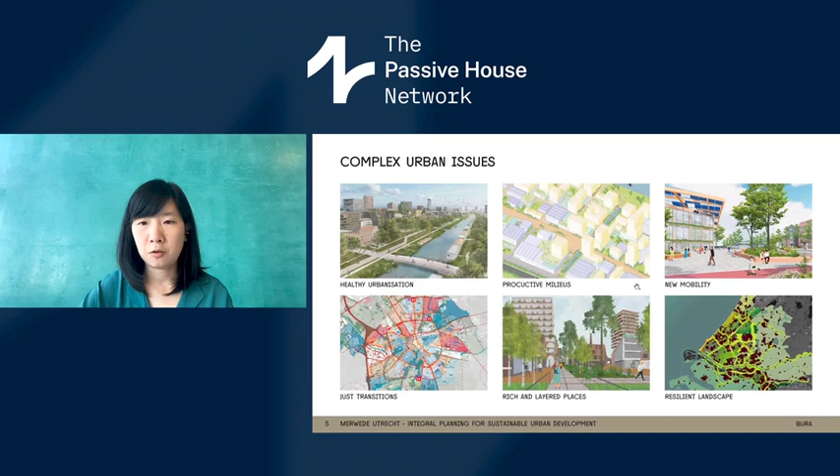We seek balance between ambitions and feasible design solutions, and we also build on existing city inhabitants and qualities. We have experience in complex urban assignments and also expertise in multiple themes, such as healthy urbanization, productive milieus, new mobility, just transitions, rich and layered places, and resilient landscape.

Merwede is one of the representative projects of BURA, which employs integral planning and research by design in its process. Merwede is a project in Utrecht, and Utrecht is a city in the Netherlands. It is known for the historical city center, the characteristic canals, and also the historical monuments and university.

One of them is the compact city approach, which means to guide a balanced mix between different districts and to limit car use and accommodate urban densification in a healthy way within the urbanized boundary.

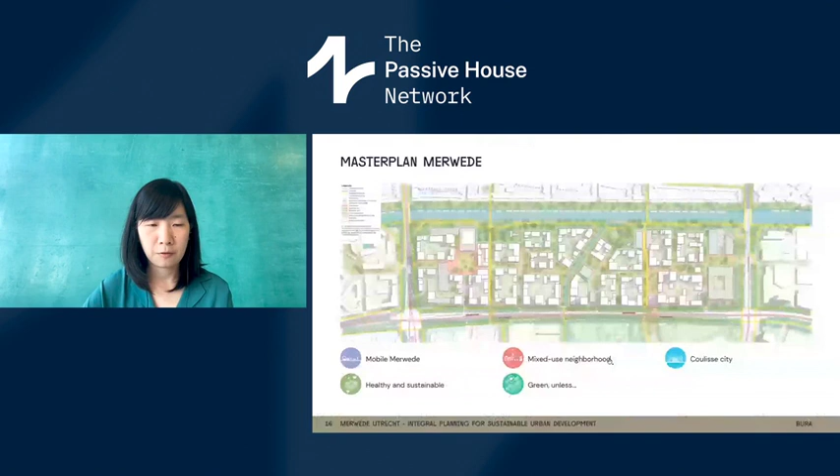This is also the master plan we proposed for the area, with example designs of the buildings presented in the project. In Merwede, we have 5 ambitions: mobile Merwede, healthy and sustainable, mixed-use neighborhood, green, and the Coulisse city.

Coulisse city is one of the main features of the urban quality. That means a layered building volume and morphology with emphasis on human scale and the city on the eye level. It also focuses on the quality of light and air and the porosity of the blocks. We organize those principles into an urban rule map, which provides a guideline for the architects who will design the different blocks and buildings.

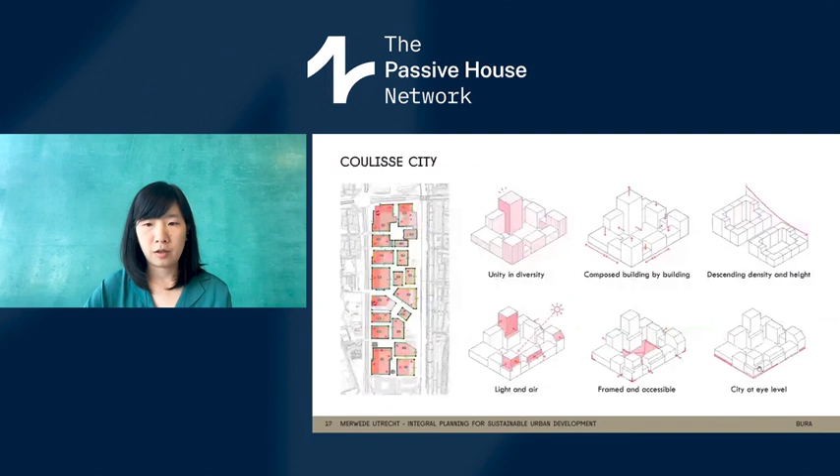Here you can see an example of the design by the architects, showing the principles of human scale, setbacks, green, and so on. An interesting aspect is that we designed the urban plan with exact rules but also flexible guidelines, so that together with the diversity of the context, the urban framework, and the programs, this can lead to innovative and diverse solutions from the architect's side.

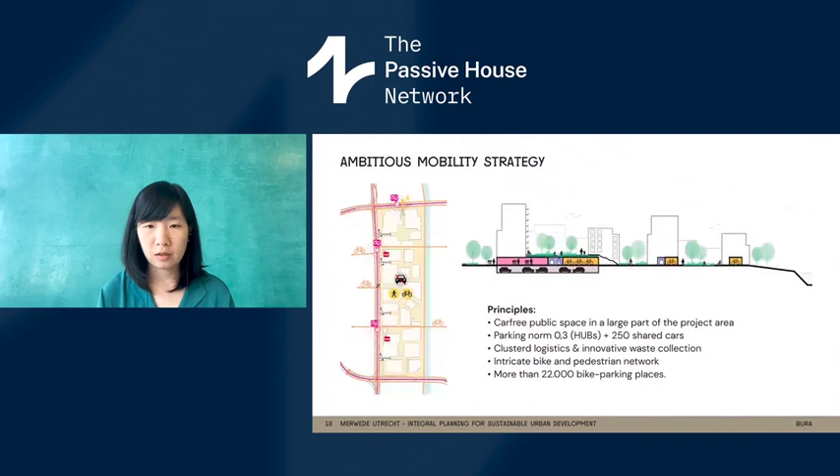In terms of mobility, we have a very ambitious goal. We make the area mostly car-free and invest in a good bike, pedestrian, and public transport system. Next to that, we organize parking with around 1 parking space for every 3 households, so it's a very low parking norm, plus around 250 shared cars. We also have more than 22,000 bike parking places that will be added in the area.

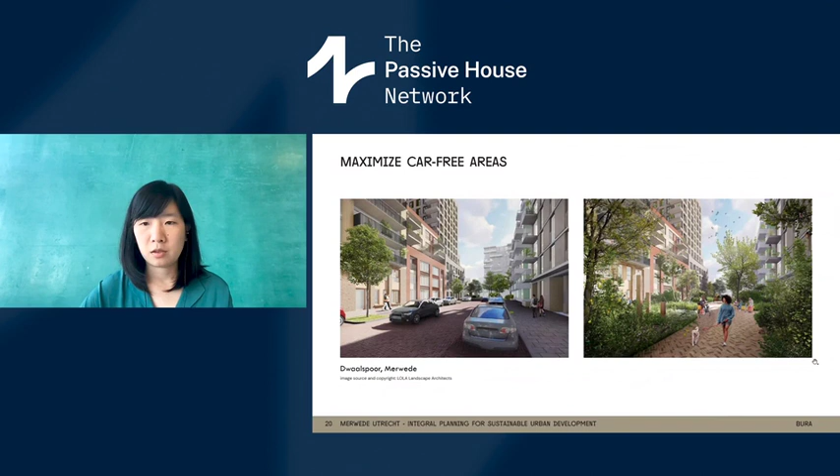The car-free principle provides us the opportunity to design the public spaces differently. From these renders, you can see that the same streetscape can look completely different, with much better green and public space quality, when the paved areas are reduced to the minimum, only for necessary routes like emergency routes for vehicles.

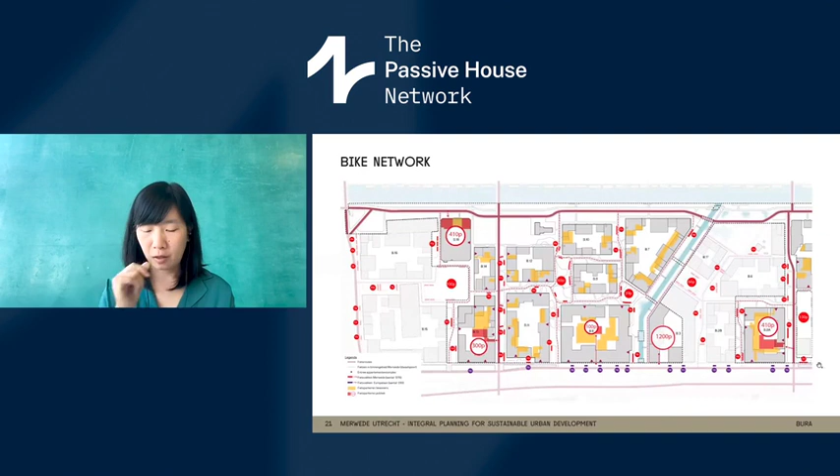Together with the landscape architects, we carefully designed the bike network with different hierarchies for the bike routes, and we also carefully distribute the bike parking for the residents and visitors of the district. Here shows one of the east-west cycle routes through the project area, which will connect Merwede to the surrounding neighborhoods and the city. The pavement materials are also carefully thought through so that there is a different hierarchy indicated, and there's a balance between accessibility and ecological quality.

The car-free ambition also means that we need to organize the logistics differently. In the area, we allow logistics with limitations in terms of time and routing. We also introduce innovative solutions such as light electric vehicles, logistic hubs, and mobility hubs.

In terms of program, Merwede will not be a monofunctional residential area, but a mixed urban environment where basic facilities are available in the vicinity. This can stimulate a healthy lifestyle with less car dependency. Roughly 15% of the total program is dedicated to commercial, social, and business programs.

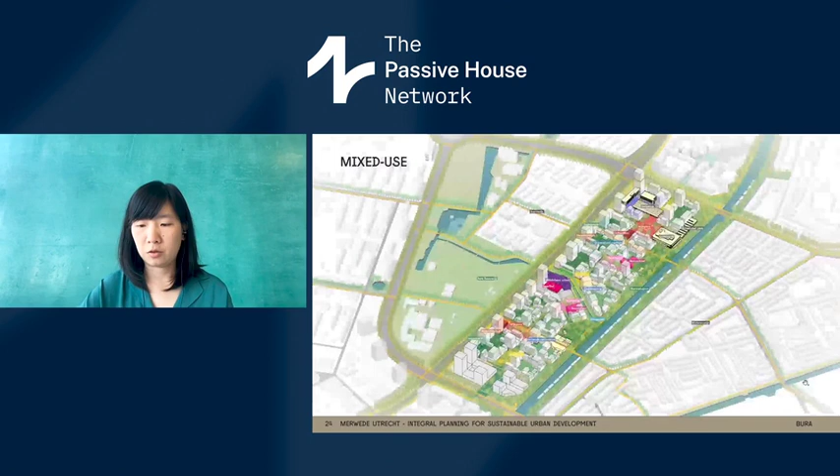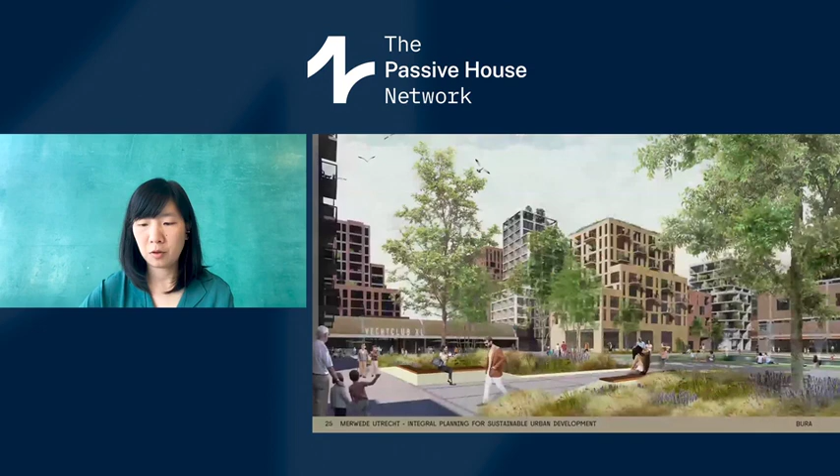We also have different types of spaces. As you can see, the two main neighborhood squares are situated around more lively programs, but there are also more intimate and green spaces for people in the area to enjoy calmness in their everyday life. This is an example of one of the main neighborhood squares, where you can see the dynamic plinth and programs, and also some of the existing buildings that we keep and transform into new use.

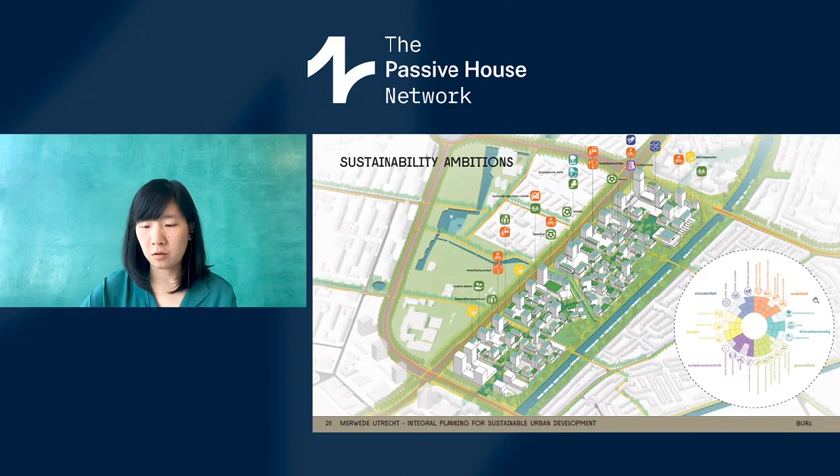Merwede aims for high sustainability ambitions. We have one of the largest heat cold networks in Europe. For all the roofs, we make use of them for either solar systems, green, or collective spaces, so there's no roof left unused. Overall, it is also a search for balance between the different aspects of sustainability, optimizing them with a good spatial distribution.

The sustainability goal in Merwede also has a social aspect and plays a very active role. We have proposed a Merwede City Lab that will connect residents with experts and the latest technologies and innovations for sustainability solutions. So it's not just about achieving technical and scientific goals, but it also plays an important role in social interaction and an inclusive process.

In terms of green, Merwede provides a high-density urban environment, but also at the same time green and relaxing. The principle is that green, unless necessary, is leading in Merwede.

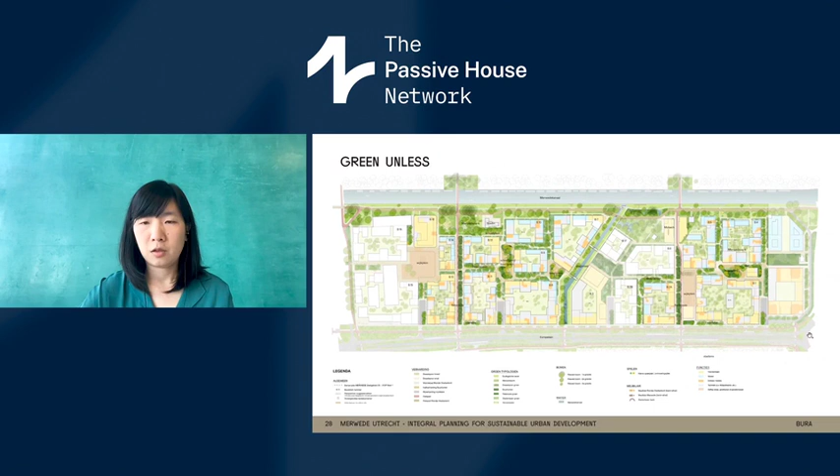This means the starting point is green, and paving in public space will only be done when necessary—for example, for some bike routes or paths for limited vehicles, or parts of squares beside busy facilities.

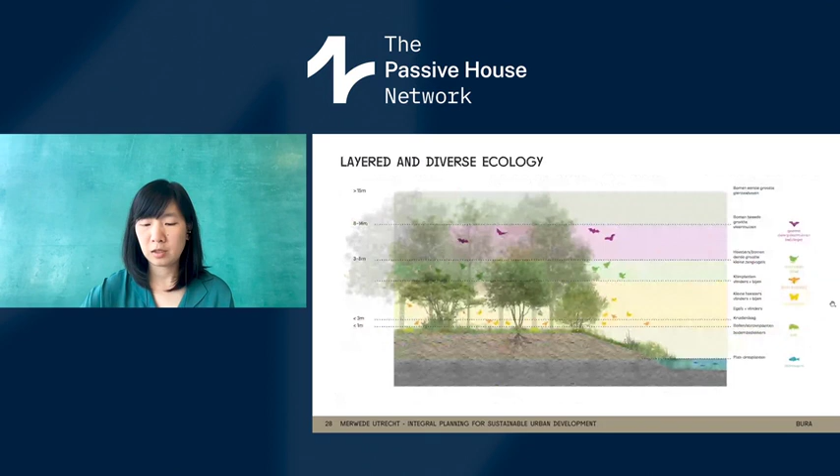The green in Merwede is also diverse and layered. It is not just short grass with clean-cut trees, but also different herbs, bushes, and a wide variety of trees.

In this way, the green structure is robust and can provide a good environment for biodiversity. The building blocks also have their green tasks, including inner courtyards and green roofs, to provide habitats for target species like animals and insects.

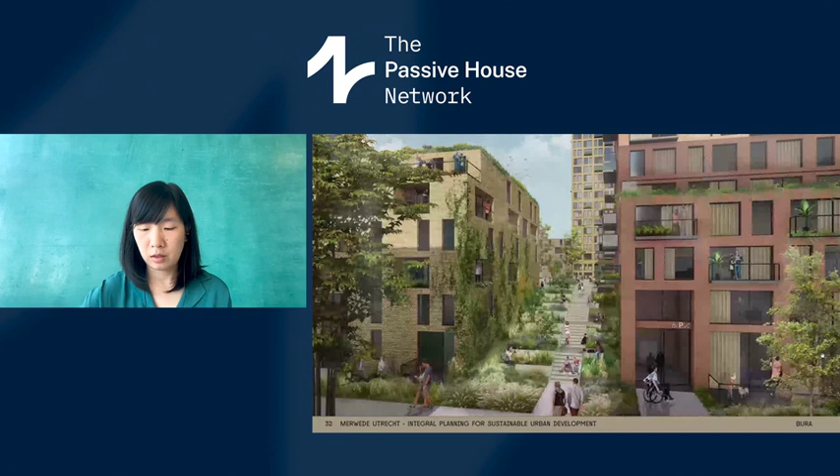The following images show how the area could look, and how green is integrated in different levels of spaces—such as the neighborhood square, with spaces dedicated to both nature and human activity. This also shows how the buildings contribute to the green environment, including green facades, roofs, inner courtyards, and balconies.

Last, we would like to share some lessons we learned during this process. First of all, we think an integral vision from the start on sustainability, mobility, and other aspects is very important. The research-by-design way of working allows us to stay open-minded, to embrace innovation, and think out of the box.

The public-private development was quite important—it's almost a must for the plan to keep going. And thinking through the different scales is also useful.

Sometimes we can zoom in on details, but also shouldn't lose the bigger picture. Sometimes it's necessary to think differently in terms of policy or different finance and governance models. Last but not least, it's important to stay the course, to insist and persevere through the whole process.

Finally, we think this project is an example of integral planning for developing sustainable urban areas. We would like to discuss further with you how this can contribute to different urban projects in the world.

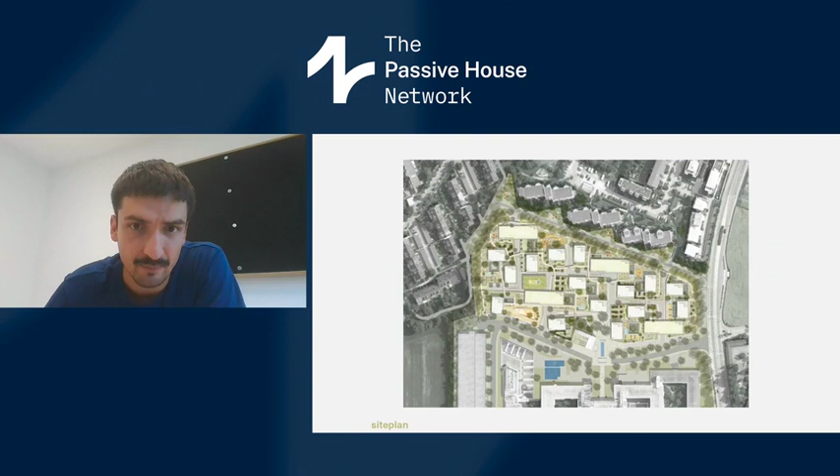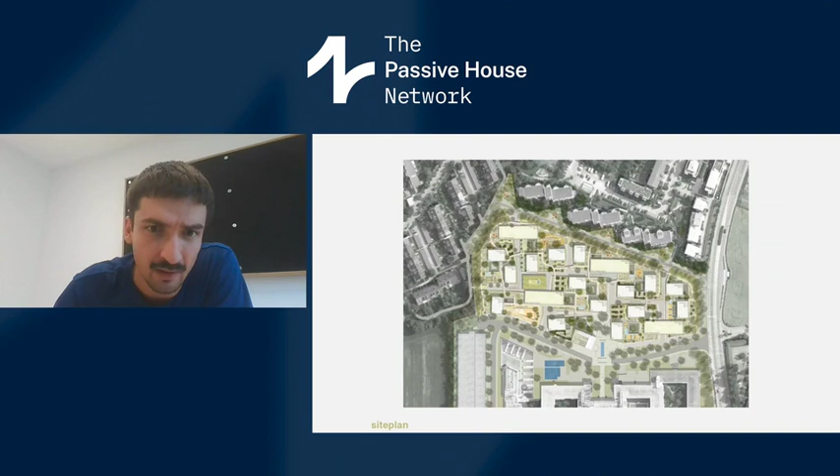The second thought was that if we don't have the cars, we want to offer a lot of bicycle spots where we can not only easily park our bicycles, but also repair them. Another thought was to add community rooms, and instead of private gardens, we have shared gardens, which are also part of this community thought, where people can do urban gardening. All the gardens are on top of the clods.

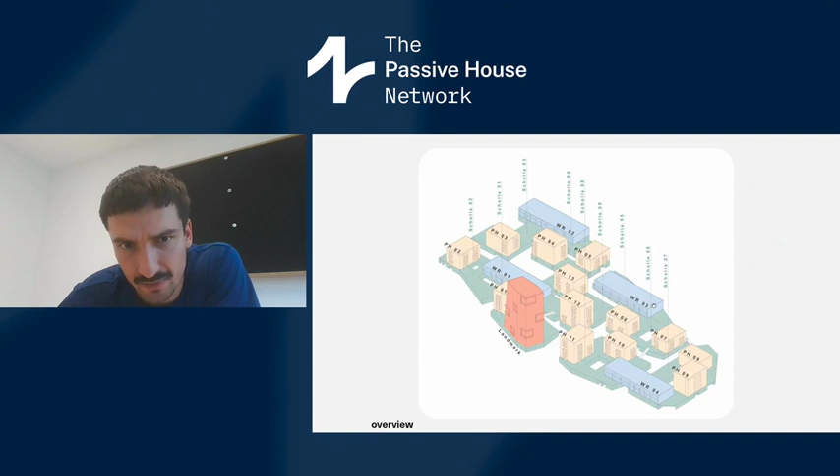So I will continue - this is how it looks in the isometry. We have the punctual houses in orange, the pergola houses in blue, and the clods with polygonal shapes. Inside the clods, we added some light yards to bring light inside this very deep structure. And finally we have the landmark, which marks not only the housing but also the community area, bringing them somehow together.

So now I have some slides with isometries to get a closer look.

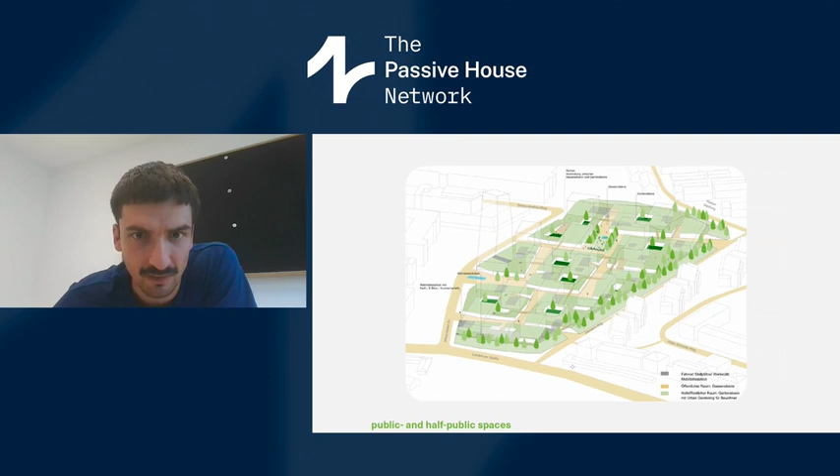This is what I was talking about already, the bicycle areas in gray. We also have a lot of bridges inside the area and ramps, so you can easily get on the clods and from one clod to another. So it's never a dead end, and it also makes them less private, more half-private. The offer is not only for people living on the clod, but also for people living on other clods, or working at the commercial area, or the neighbors - you can go there and sit in the garden.

This is how the landmark looks first. We added a cafe on top of the landmark, which can be public, so you can go there and have a nice view over the Alps.

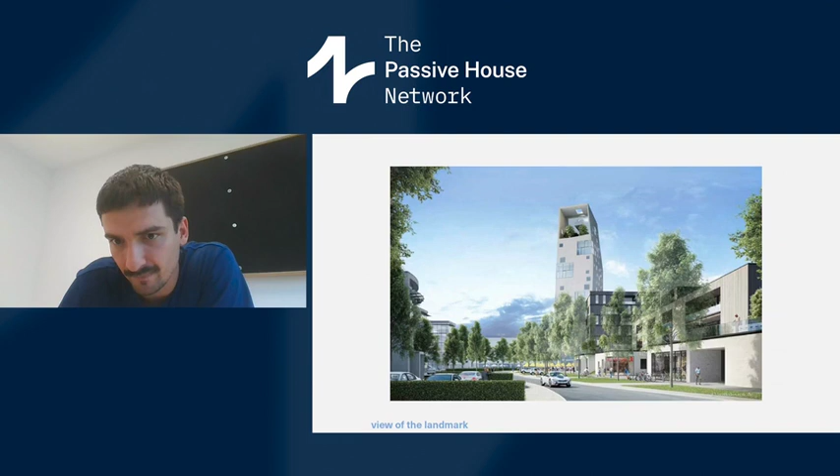We did, after the competition, a big presentation for the neighbors, and in this presentation we also had a big Q&A at the end, so we were talking to them. We got very positive feedback, but also critical voices who said, for example, the landmark is too high, or this building could be a little bit lower, or you could put the density more on the other side. That was also a good thing in this project, because we could react easily to these questions.

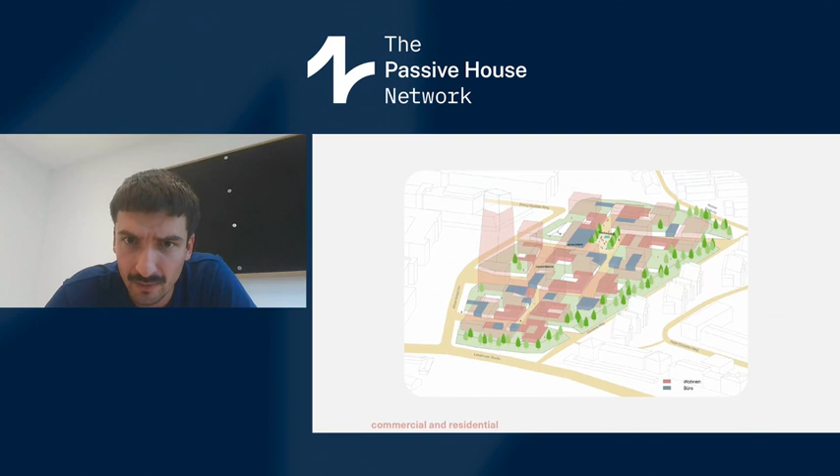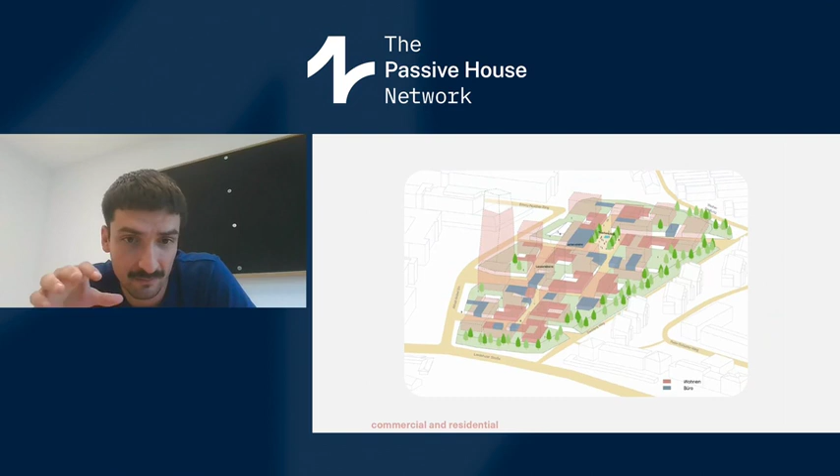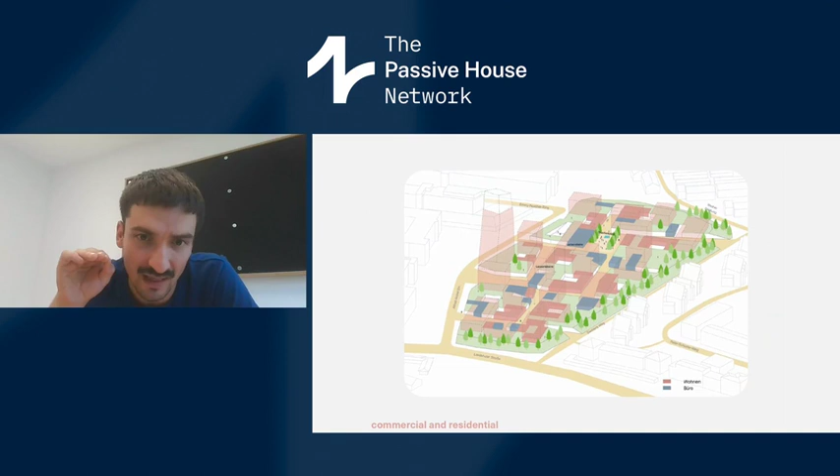So we changed some things on the height, as I already explained. Another thing we were thinking of was that the clods in the first thought were only commercial or community spaces, and that wasn't the best solution for the investor, because as you can imagine, in Unterschleißheim we don't have so many commercial interests. So we added some apartments inside the clods, which are a little bit higher, so you cannot look and go directly from the alley level into the houses - you have small stairs, about 1 meter high, making them a little bit more private.

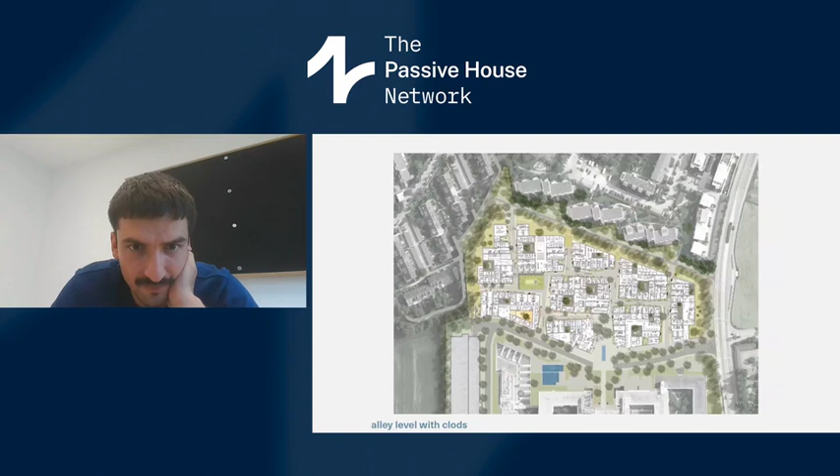This is the density of the clods with one view. So we have 9 different clods, and the clods are, as I said, polygonal and open up sometimes to build small yards here and here.

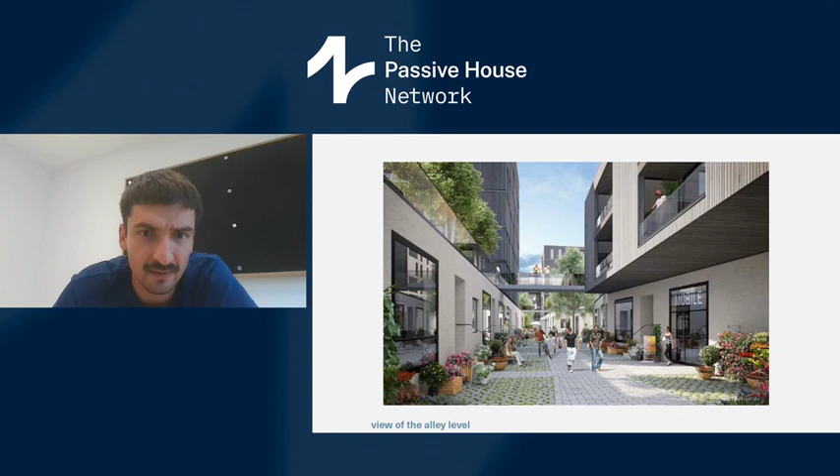And here you can see how there are alleys. We imagined the alleys at the competition, so right now they're even more green, because this was the plants on the side. We now have them fixed, it's not necessary for the people to put their own plants outside, so it's a little bit more strict on this side. And here you can see also the bridge over the clods, and we imagine it very vivid.

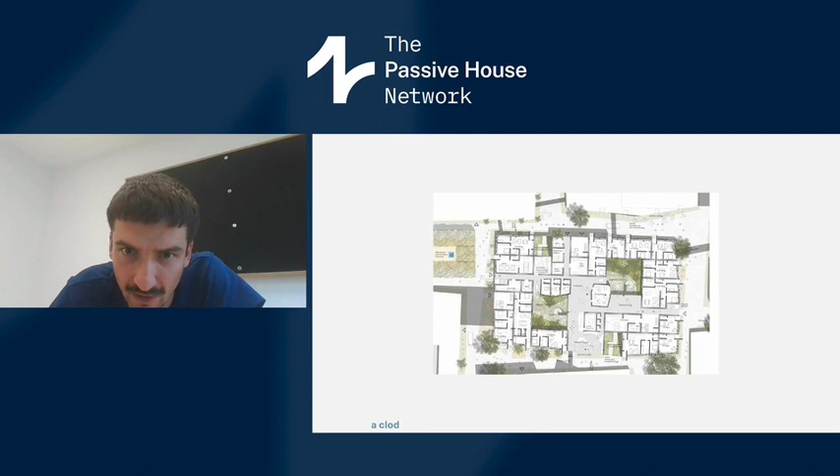Here we take a closer look at one clod, so you can see that we have areas which are very deep inside, where you can still have a lot of light from the light yards. And you can see that also some apartments with the stairs I talked about are going from the alley level to inside the courtyard, so you can also have a little bit more private yard inside, where you have a private outside area, and silent also.

This is the idea of the culture and consumption-free space. We had a lot in the beginning: market space, theaters, fitness area, kindergartens, ateliers, a cinema, and so on. Not everything could be realized until now, but still there's a big offer of community and commercial things, which give the clods and the alley level an all-day use, so to say.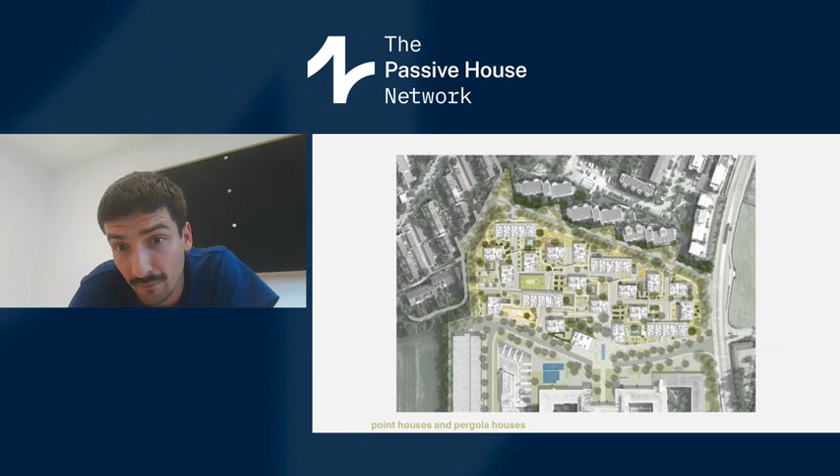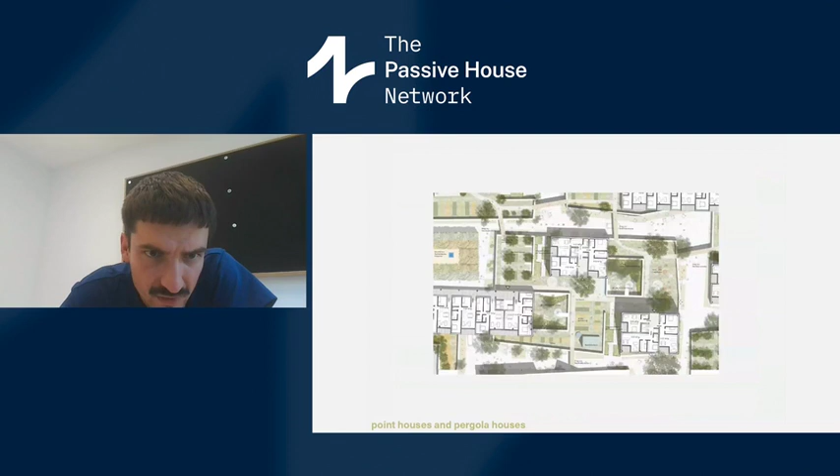This is the level of the garden, so to say, where we can enter also the punctual and the pergola houses, but you can also enter them from the alley level. This is what I call the pergola house, because we have kind of a pergola here, which we use to enter all our apartments. You don't need too many staircases, and the punctual houses have one staircase inside.

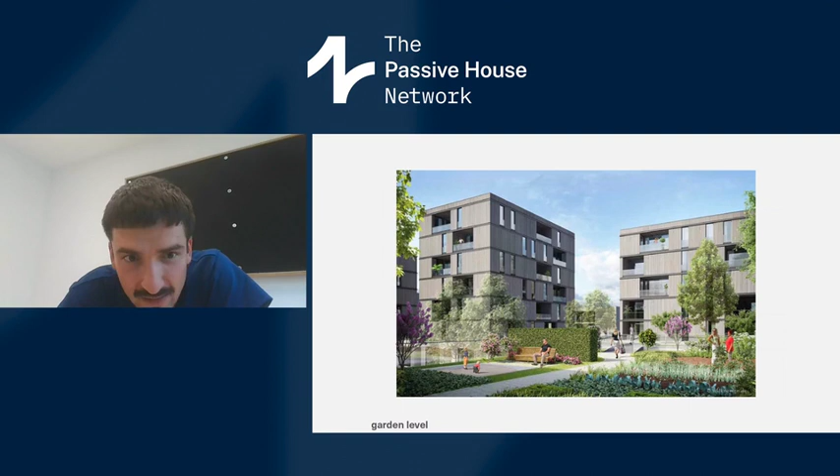This is how we imagined the garden area. So you can barely see the alleys from here - it's really on level.

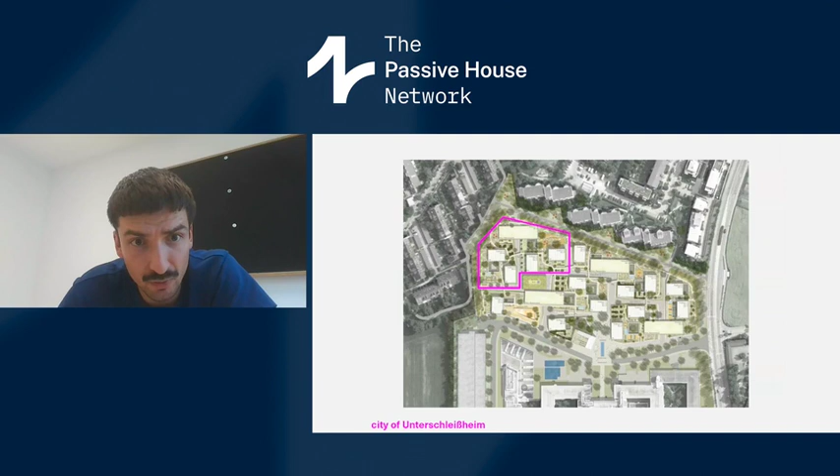Now we take a closer look at one area which is not anymore part of the project of the developer. It was bought by the city of Unterschleißheim to have social housing also in this area. This area is right now in what we call Leistungsphase 4, so it's like in the middle of planning - right before we start the construction.

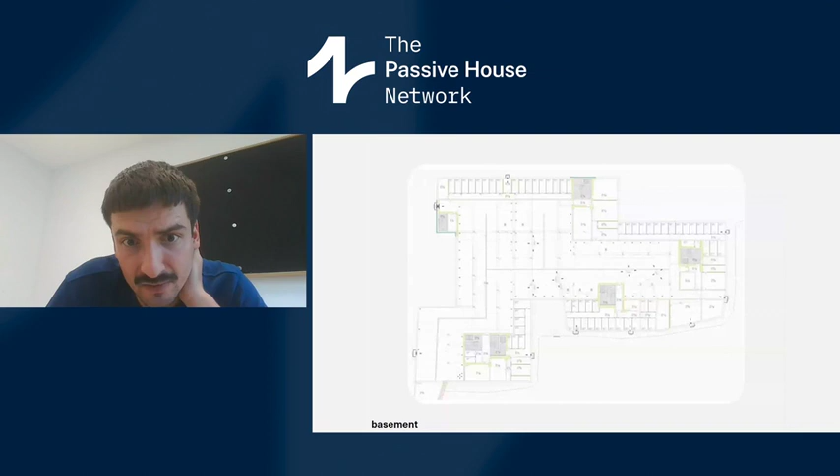And what you can see here is the basement, and the basement is connected here, but we also tried to have the basement only under the clots, so we can plant big trees on the alleys and also on the yards.

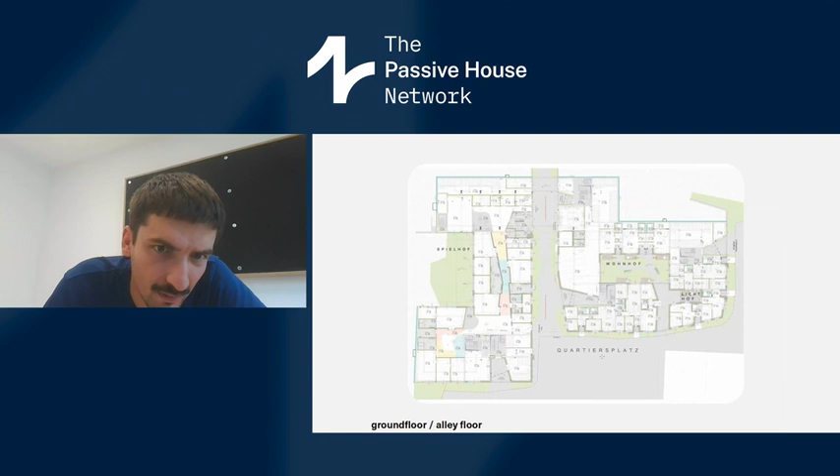Here you can see the ground floor, where we have housing units, residential units on the right side. Here we have a community room where the people living here can come together for a community activity. And on the left side, with a polygonal shaped floor, we have a kindergarten, which has its own playing yard outside here, but also on the roof of the clot.

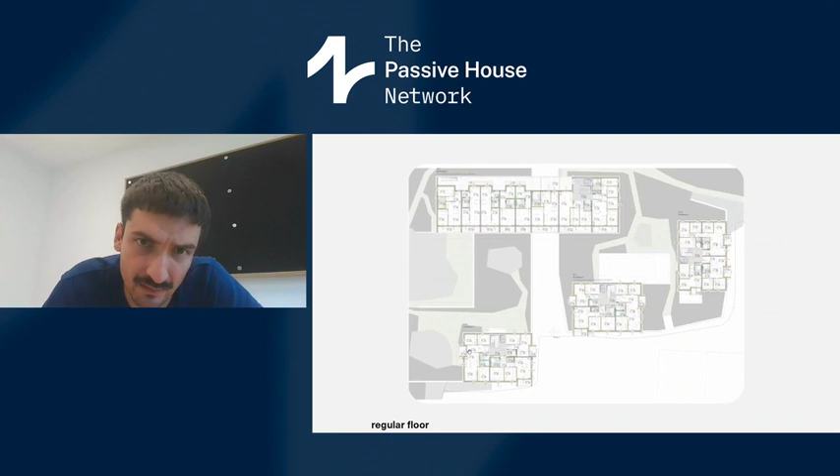And what you can see here is the entrance for the punctual house here, and we also had the entrance for this house inside the clot, and you can enter them from the ground floor.

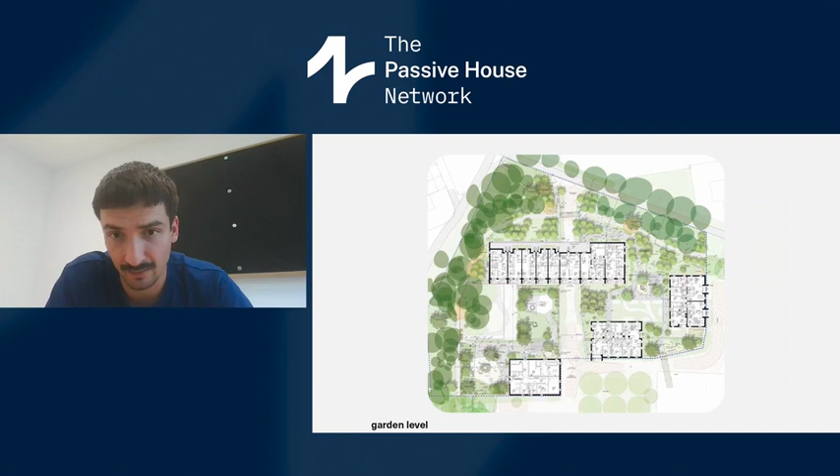To reach this goal, we developed a pattern catalog. Maybe someone knows the pattern language of Christopher Alexander. So we looked at very special things, or less special things also, and designed them very precisely at an early status of the planning, so we can discuss them very early, and later on they are implemented in both teams.

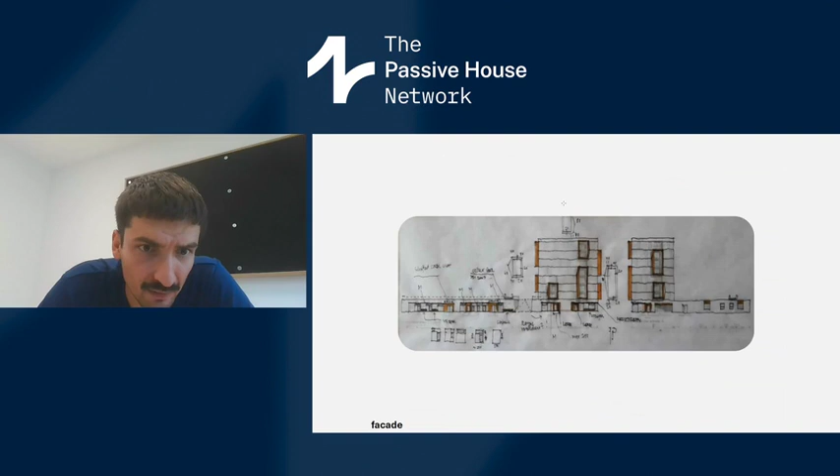These patterns are used for the architecture, but also for the landscape architecture. Here you can see, for example, one pattern, which is the loggia, framed by a corten steel frame. And also we have this pattern for commercial areas, or the patterns for the entrances. We have patterns for the facades and so on.

This is a view from the south. We have the landmark here. We tried to have different kinds of materials at the clot area, and for the clots and for the punctual houses, because we wanted to have the punctual houses and the pergola houses kind of flying over the clots.

So what we did is we wanted to have brick for the clots, because we imagined them like something coming out of the earth, which they really do, because we have a wall framing the whole area, which already exists, and we tried to keep this wall. You can go from the area of the wall directly onto the roof of our clots. The punctual houses have wood facades, timber facades, so yeah, they are different.

But I will pick up this topic later again, because I want to show you that it's not the facade that is most important for us, but also what is behind the facade.

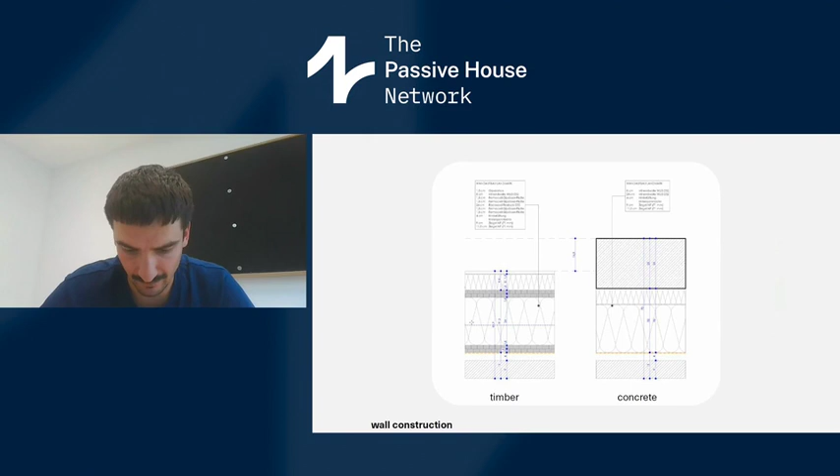The investor was able, in all areas of the whole neighborhood, to add this 17 centimeters to his living floor, which he is selling or renting. So the timber construction is used not only at the timber facade buildings, but also at the clots, which have the brick facade, and also at the landmark, which is, so to say, also a hybrid wooden building.

And this is already the ending of my presentation. I wanted to add some sentences because we are here on a Passive House conference, and I wanted to say that in our office we are focused not only on wood construction, so we want to do ecological constructions, but we also focus on energy efficient buildings. So we try to create and follow always the Passive House rules in all of our projects, and want to do the certification.

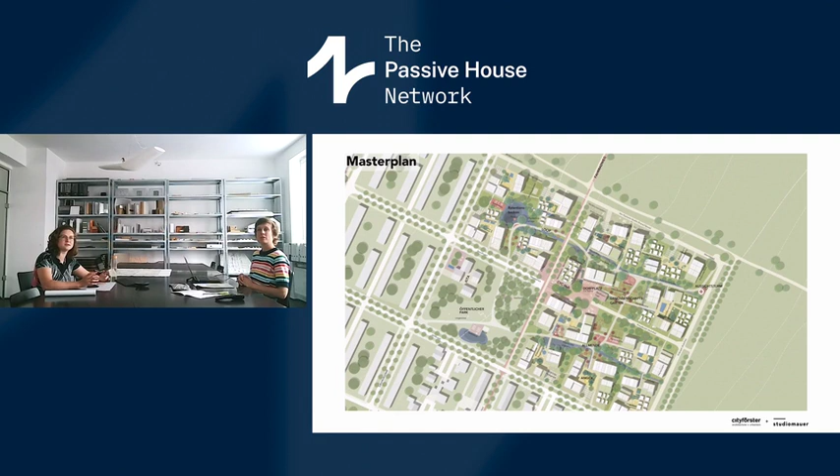That is the design of the area, and we will now dissect the main components of the concept. Really the heart of the area is what we call the village center, the village square. The whole term around village developed over time, so it's not necessarily the best term to describe the area, but it does have an urban feel.

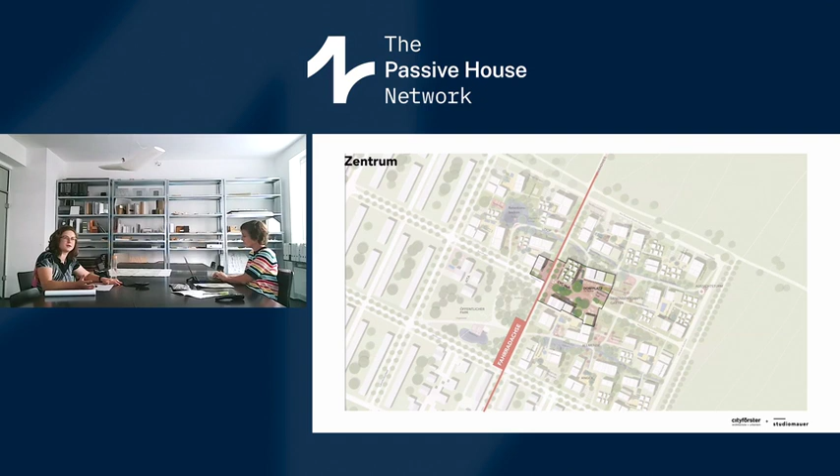In the center we have what we call the CYC Hub, with shared spaces, like a library of things to share material objects. In the CYC Hub we also have an area where you can come and exchange construction elements, or borrow a vacuum cleaner when you want to work in your house — really the idea of shared living at the center.

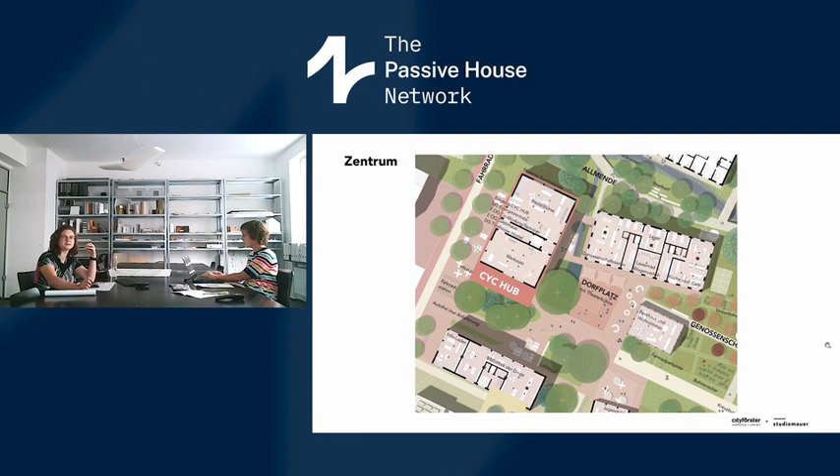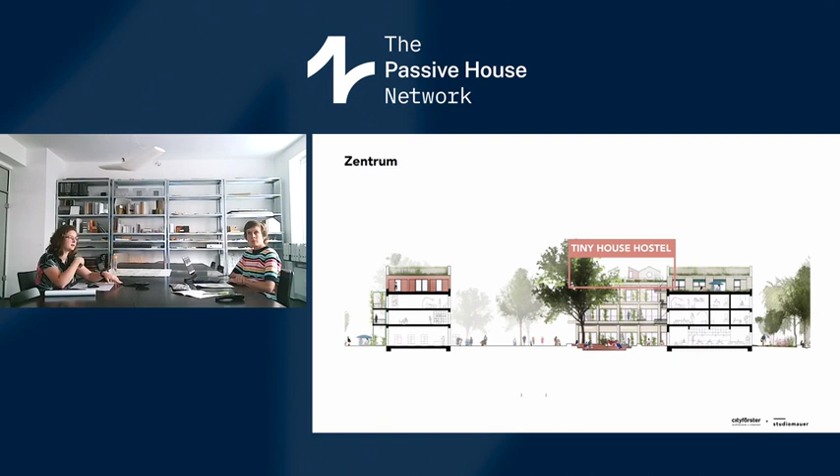Here you can see it in the section as well. We integrated a tiny house hostel on top of the CYC Hub. The idea is that you don't have to have big apartments, but rather smaller ones, and if someone comes to visit you, the guests can stay in the tiny house hostel, centralizing the idea of guest houses or guest rooms.

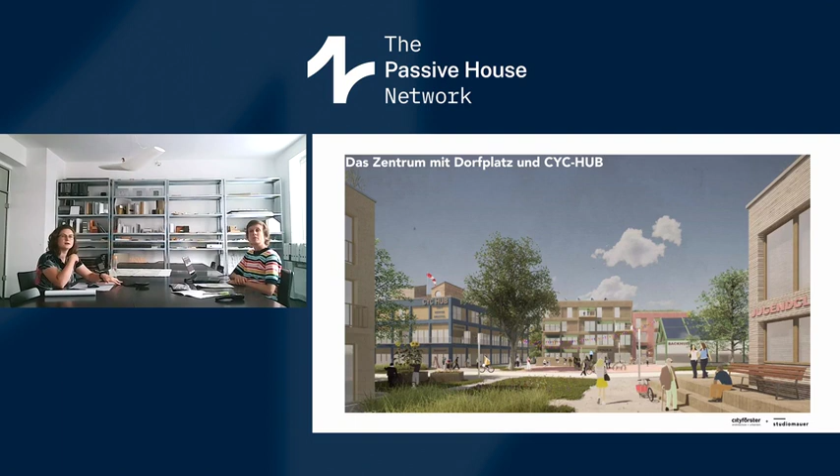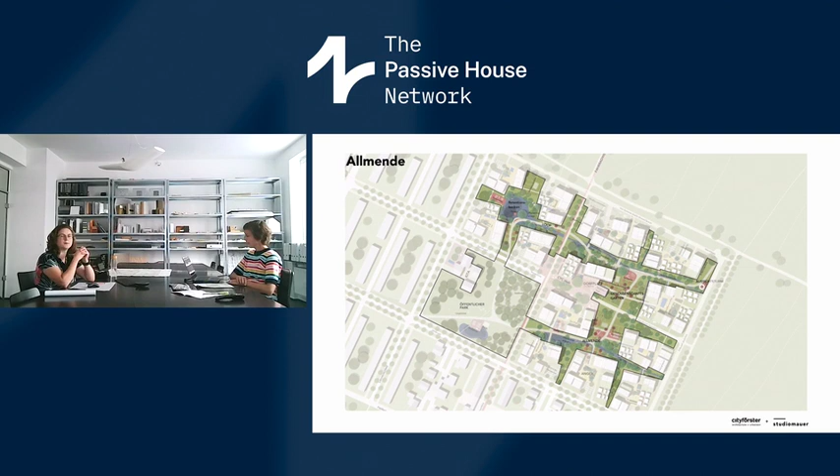The idea is that this is a really vibrant place where people meet and exchange. In contrast to that, you have what we call the Allmende, quite an old German word, describing a green area where you can go gardening, with urban gardening concepts — a green area which is also a social place.

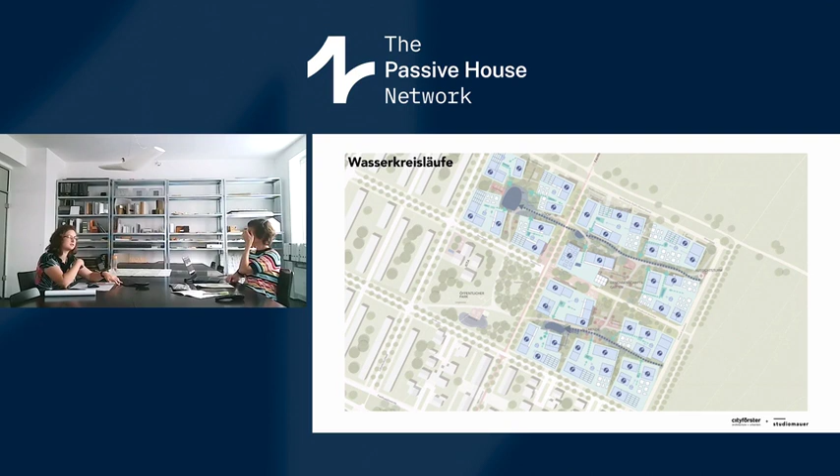The water concept is also based around collecting water, using water, storing water. We have little cisterns where we collect water that can be used for gardening, and retention areas where storm water can be stored. It's integrated into the idea of the garden of the city, to have the water on the surface and not underground.

That is how the Allmende, the green inner area, can look like, where people do their gardening, but which is also blue and green space.

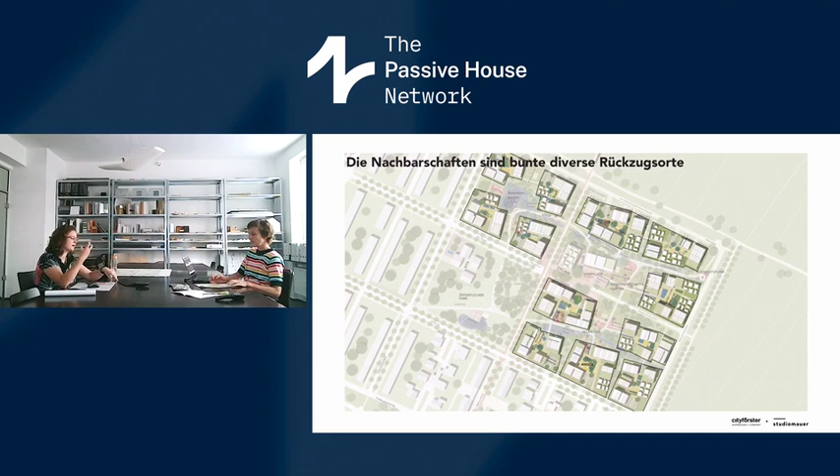The core of the concept is to have little neighborhoods where people come together, with little central spaces and also more quiet areas to live in. The center of the neighborhood uses the German word Anger — not meant as anger or to be angry, it's just an old word that describes the heart of a village, where people meet and come together.

Really important also is not to have parking lots all over the place, but to have them collected at the outskirts of the Eco Village — bundled parking.

We have rain gardens to clean the water, and of course parking. Bicycle storage is also really important. It takes a lot of space up because we want people to cycle instead of use a car. So to have also good bike storage, not just outside, but also inside where the bikes are really safe.

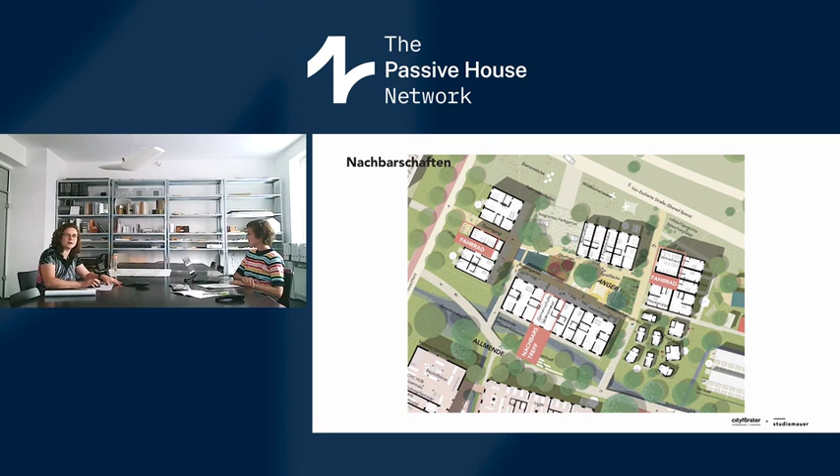Yeah, and that is kind of how it could look like, the smaller, more quiet areas inside the neighborhoods. Now we will jump to the next section.

This shows the typology mix, which means one aim of the project was to develop a variety of building types, because the goal is to also offer a variety of apartments to a variety of people, so that the social mix in this area is also quite high. This is also one of the goals of the cooperative that is organizing the project, which has around about 500 people that are joining it now, maybe even more now. So what you can see here is that the different colors symbolize the different housing types.

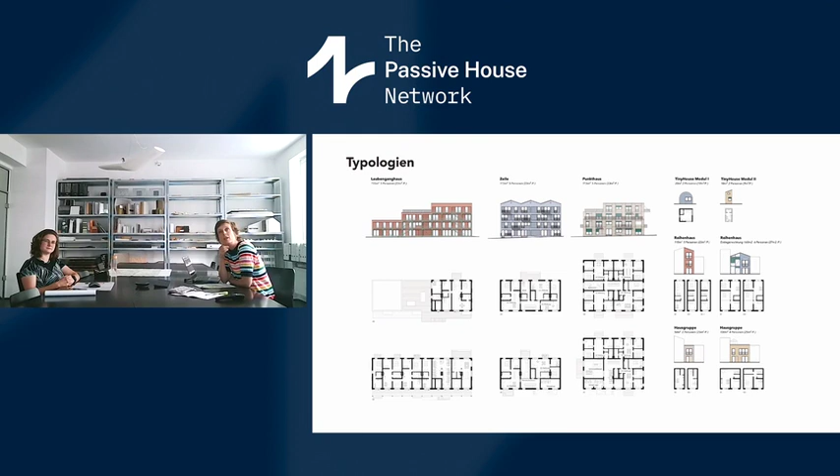And some of them are introduced in the next slide. So you can see from left to right a house with a special circulation system, which we call Laubengang house, so that has an open circulation, like a pergola or arcade. Then we have a more classical type, which is called Zeile, with 3 or 4 apartments on one floor, and one quite chubby typology, which is called Punkthaus, with a very efficient circulation system. And then some tiny house models that are within the mix, one of the rare typologies. So most of the people will live in these multi-story houses.

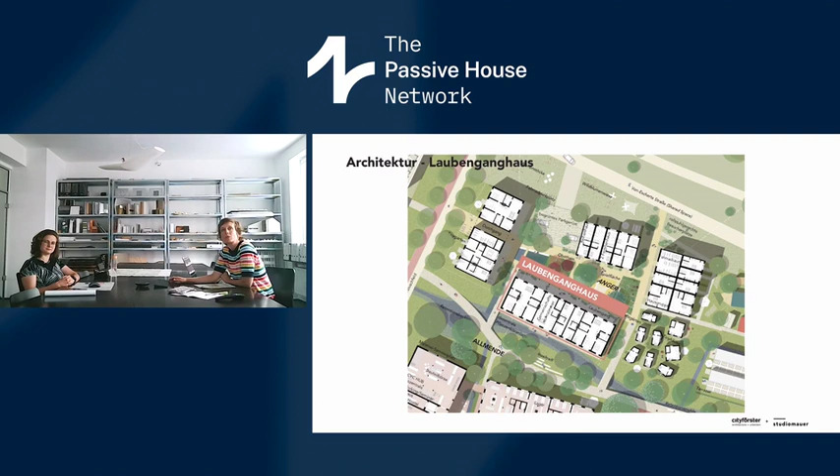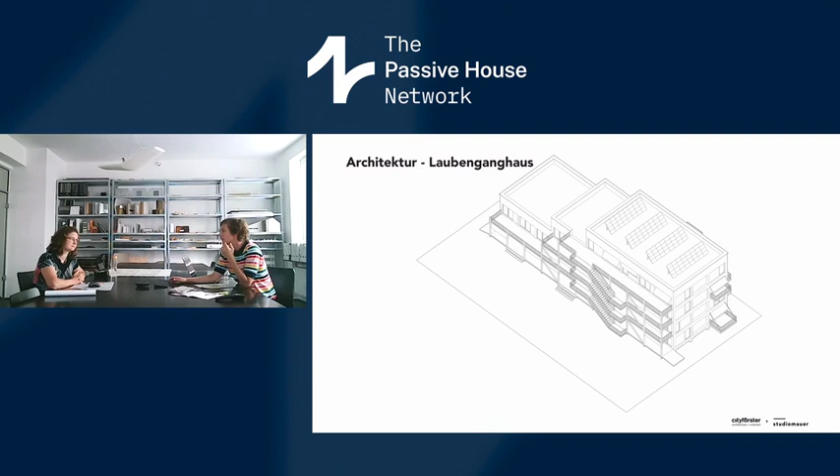Here you can see that each of the neighborhoods has different typologies. In this case, the Laubengang house, the one with the open circulation system, is marked, and you can see it here. That is, it is also quite spacious. So it's not only functional, but it also serves as a meeting point and community, like an open air community space for informal meetings and neighborhood life.

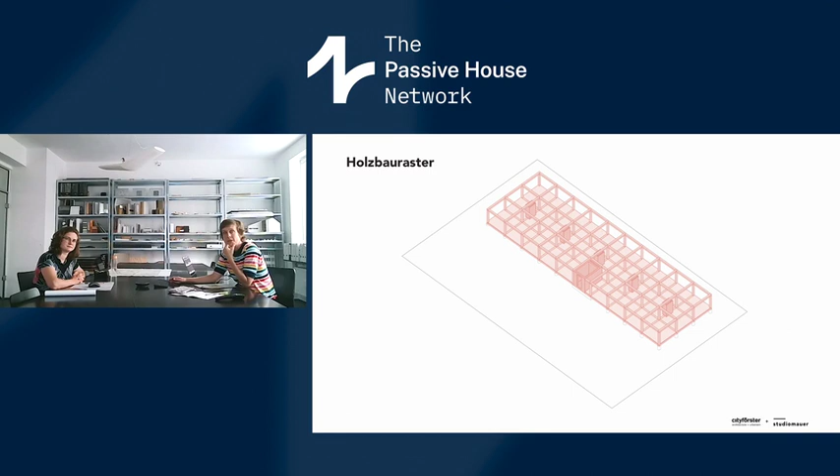And all construction is of course based on minimizing resources and gray energy. So the foundation is planned as Punktfundamente, so very tiny foundations that are easy to deconstruct and use less concrete than other foundation types. This is the grid of the wooden construction, so quite efficient and standardized. This is, as I already explained, the circulation system as an outside area, like a vertical balcony for the whole community.

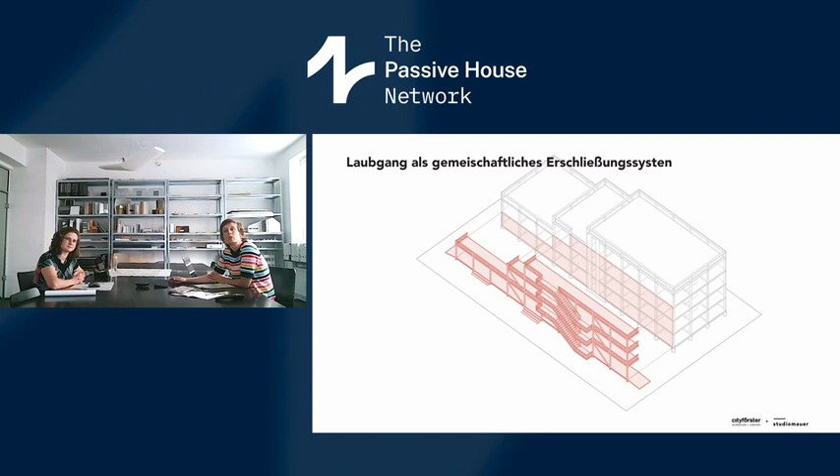And of course, the roofs, not only of this type but of all houses in the area, are used for energy production, solar energy, and at the same time they are green roofs, so that is the combination of an energy and green roof. And partly the roofs are also used as roof terraces, so again a shared space for, in this case, the neighborhood.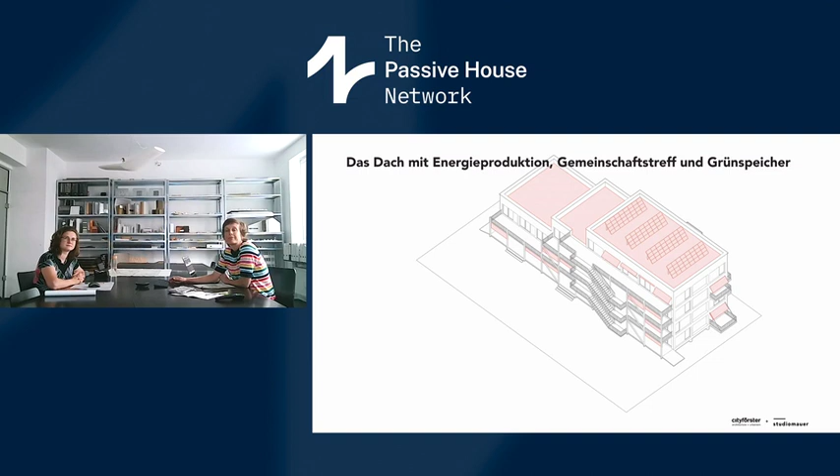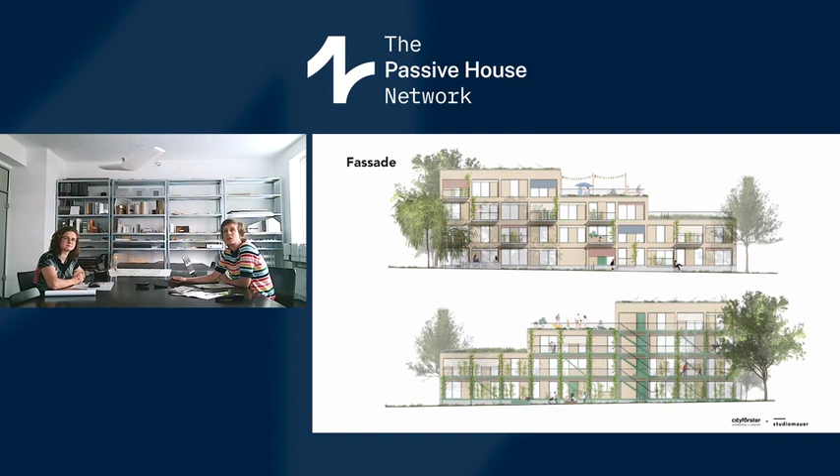The facades show that they should be quite playful and show the inner life to the outside, with balconies and these roof terraces. But there's also an ecological factor, because it's planned that also parts of the facades are greened to enhance the microclimate of the area.

In this case, the apartment is planned so that in the future it can also be subdivided, in regard to different lifestyles and different living phases. For example, your children move out and you're willing to also reduce your own private living space, but you don't want to move out of your apartment, then you have the opportunity to divide the space and give part of it to another party without big construction necessities.

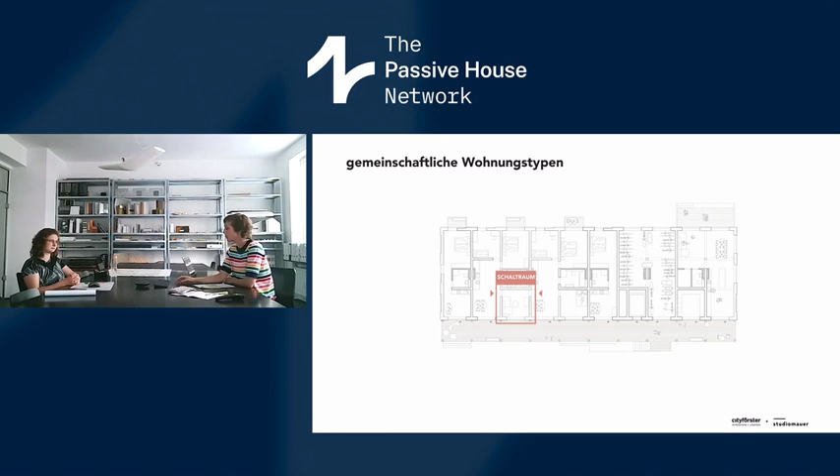And this is the idea of a Schaltraum, which means that this space can be either used by the apartment on the right-hand side or the left-hand side, also depending on the necessities of a certain living phase. So when you need more space, you don't have to leave your apartment, but you can have this room for a certain time, and then you share it again with the other people, with your neighbors. So also the idea of flexibility of apartments growing or shrinking. Thank you.

All the buildings also have shared spaces, mostly in the ground floors, like a big space to park all bicycles in a safe space, a neighborhood room where you can eat together or do events together, and also more practical stuff like a Waschküche, a place to wash and dry clothes, so the apartments don't need that individually, but share these spaces, machines, and energy.

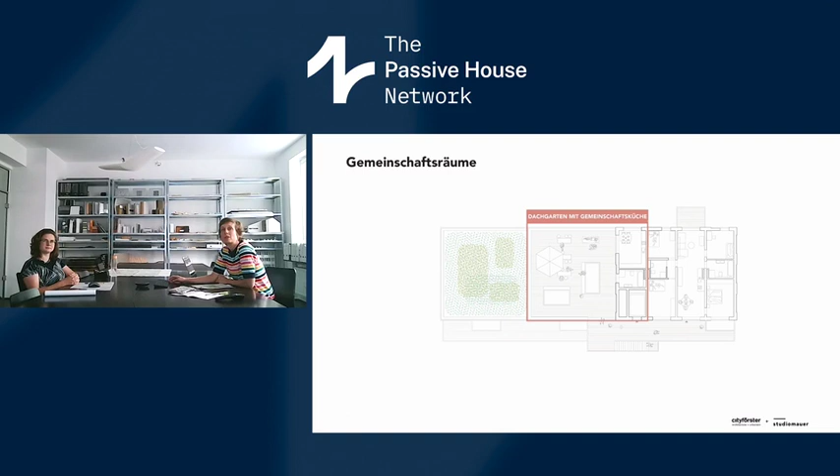And this is on the upper floor, also communal space. This is the roof garden with the communal kitchen.

Okay, this is the end of our presentation. It was more an overview on the urban design, the overall water concept and energy concept, and of course the idea of communal living in this area.

We also hope that you understood that this project is based on the sustainable principle of sufficiency, Suffizienz as we call it in German, which means that the whole project aims at reducing the amount of resources, energy, and emissions used, not only to develop the project, but also in its whole lifetime.

This also means that individually, every person who lives there is willing to reduce the space they privately use. So all apartments are minimized. In numbers, this means each person only occupies 28 square meters, including all the shared spaces.

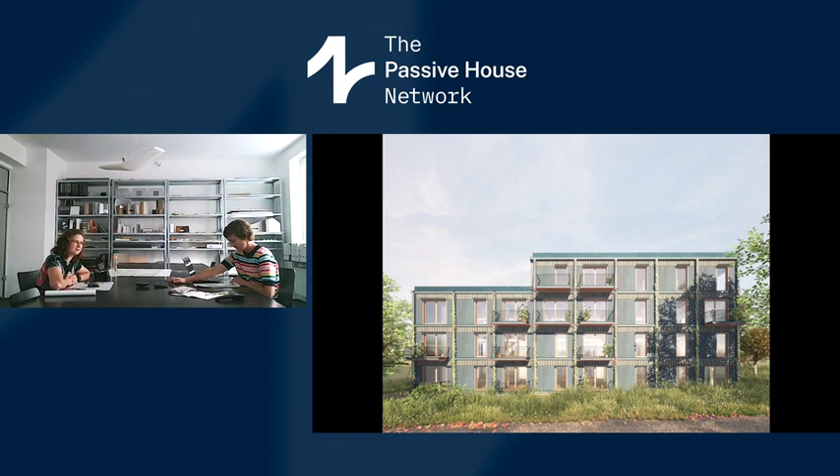Maybe to add, the project was initiated by an association who are really involved in the whole process. But that would take another 20 minutes to discuss. Maybe in the questions we can discuss it further, and anything you're interested in will be nice to hear about.

Yeah, maybe to end with some numbers to give an overview of the dimensions of the project. The total area of the eco-village is 5 hectares, and 3.5 hectares of it are open space, mostly vegetation-based. It gives space to approximately 1,000 inhabitants, so 500 residential units are planned at the moment, of which 40% are social homes, and the rest is planned as affordable constructions, where people who intend to live there can also join the construction phase.